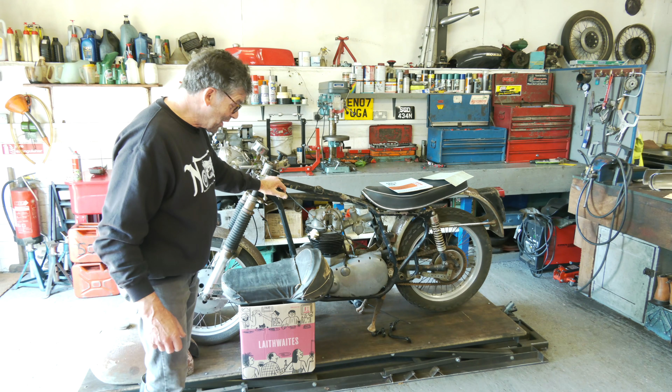We've got another Norton, no ordinary Norton, this is a P11. Behind Alex, just point out over here, we've got my project bike. And you're going to say, what have you done? Well, we'll talk about that in a moment.

Today we've got the Scott up and running. So we've got the sidecar on, we've got most of the wiring done. It has got a little bit of work to be done still - we've got to maybe adjust the clutch and a bit of fine tuning, but it's up and running.

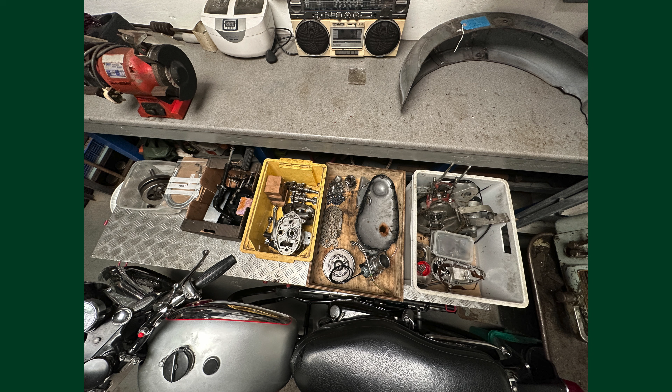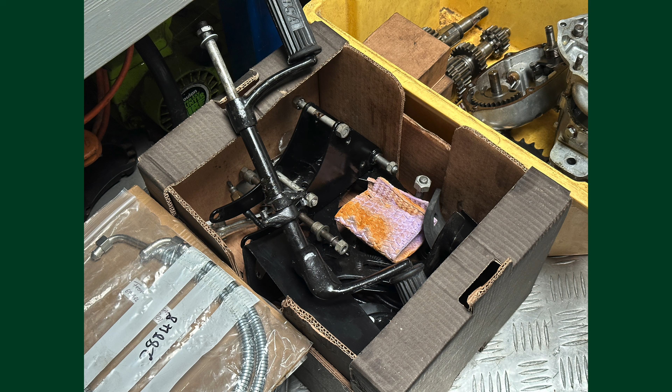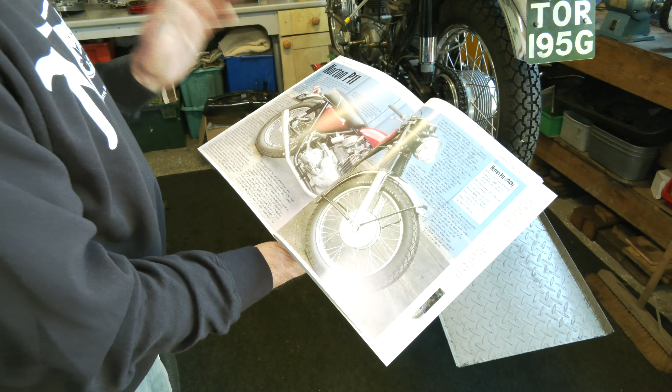What we really want to talk about today first is the Norton, the P11. So what we got here is the P11. Now this one is slightly different - it's got pea shooters, slightly different to the one that's here. But the P11 was a bike that was only in production for a couple of years.

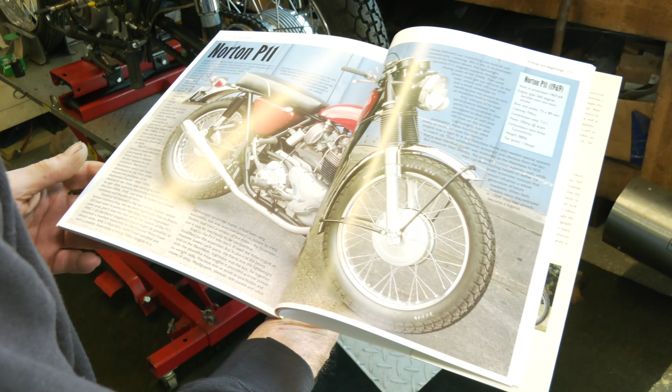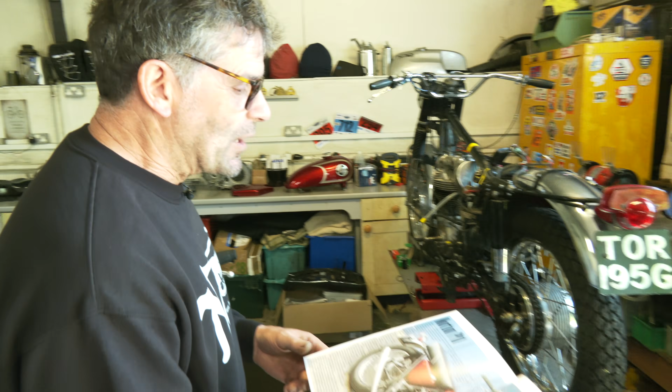Basically AMC, everyone knows that, is when you had all the companies merging together. It was the parent company of Norton. So what had happened was they had a surplus of parts for Matchless. And at that time in '67, they were talking about - we had the Atlas last week - the Atlas had come to the end of its life really. They needed something more modern because the Americans were the ones that really wanted the Norton range of bikes. Everyone knows America got what they wanted, they were more into bigger capacity all the time. That's why Nortons went up in capacity. So the Atlas is 750 and they wanted a new bike.

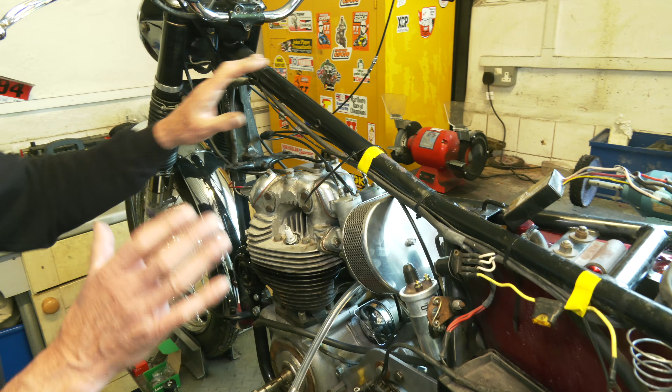So it was on the cards to build this Commando. But at the time, in the States, they were riding a lot of off-road bikes and they wanted more and more capacity. The idea was to put the 750 Atlas engine into a Matchless frame. If you look at this frame, it's not unsimilar to a Commando frame in a way. Before you had the featherbed, so this has gone to a single tube frame. And if you look at the Commando, this is very, very similar, but this would be for a Matchless engine, so you can see it was built around that.

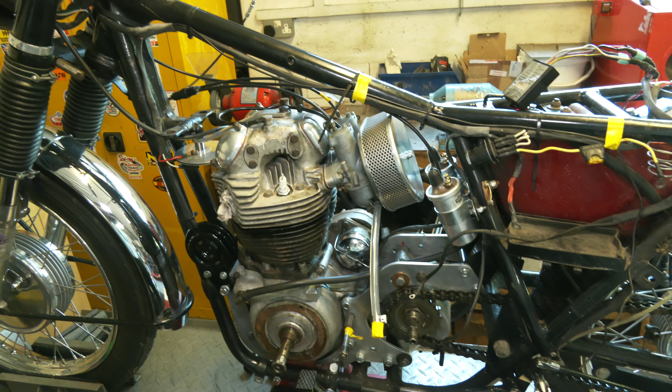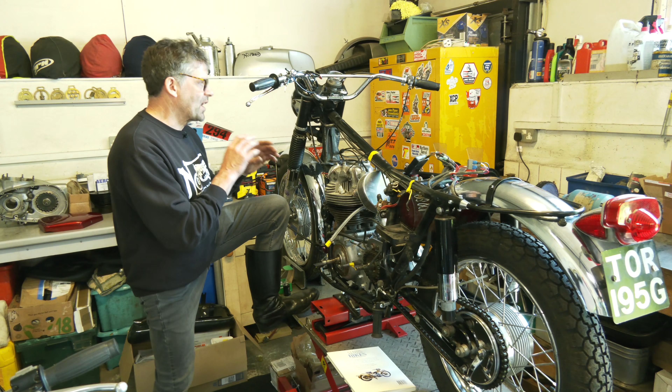So it's a lightweight frame with a 750 engine, and this is what was called a desert sled. Powerful, had a top speed of 110 miles an hour - for an off-road bike in its day, think how much power that was. Like I say, it only had a short run for 2 years because I think all the money, Norton were developing their Commando, and everything was coming to an end with Matchless, had all these surplus of parts. So they were just taking bits out of the bins and saying, yeah, we can use that, we can use that - and that's what they came up with.

But these all went to the States, this is where the market was, and it's only in latter years that they've started to come back. These are very popular now, we'll talk about this in a moment. And I mentioned before, the roads have been so bumpy with potholes, you can't ride about on powerful bikes without risking going into a pothole. When you've got low bars, like I mentioned last time, you'll be off.

So it's quite nice to have a street scrambler, and this is what it is. What you see now, people bringing out these more modern bikes and scramblers, it's been done before.

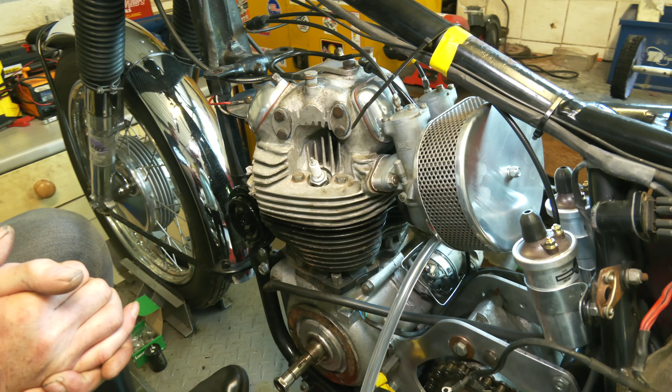So nothing new really, but this bike, the customer sent it in, and the story goes that this was one that was re-imported. I think he's had it 15 years or more.

It was in bits, I believe, when he picked it up, and he started to do some work on it, had it up together, and over a period of time it got laid up. There was some damage to the frame here, where the side stand fits on the frame - this tubing rotted away, got water into the frame. He had that repaired, stripped out the engine, had this all done, and the side stand fitted.

Now he's at the age where he wants to ride it, so he asked me would I put it together. It came in minus the mudguard, wheels are in, much the same as you see it here.

But the first thing we looked at was the wiring, and this isn't a decent loom because it's not colour coded, someone's made this for it. He's bought a lot of parts for it, and I did say to him about finishing it off.

But I said we've got to strip this engine, because if I get hold of the crankshaft, you can see we've got end float on the crank. Now if you can imagine, the crank's going backwards and forwards.

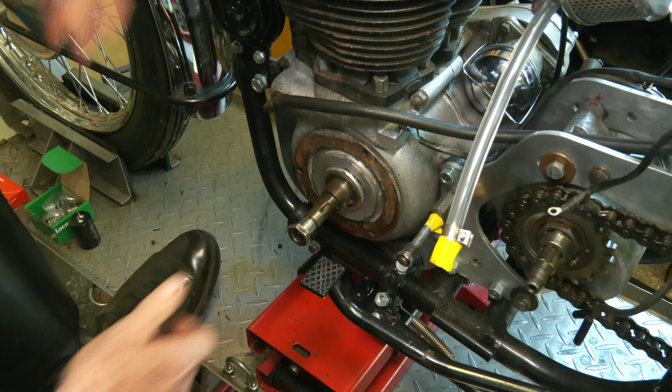Do that again, Dave. That's moving from side to side - well, it's going backwards and forwards in the crankcase. What that means is the conrods, everything's running out of line, and these bearings are in and out.

It's time to take this apart, because we know we've just done one before, what you find when you open these things up. So it's a good idea to take the engine apart and go through it.

So you have the head off, valves out, we check the guides, do the guides if necessary, same as before on the Atlas. We have the crank out, the sludge trap out, check all the bearings and rebuild that up. The gearbox will be taken out and we go through it - he's put a new sprocket on here and done the seal, but we'll whip that box apart.

Interesting thing about this engine, very quickly - with the Atlas we had a magneto, which was here, with the 4-spark conversion. Well, magnetos are getting really expensive, and Lucas stopped making them, so this is the first generation of a set of points.

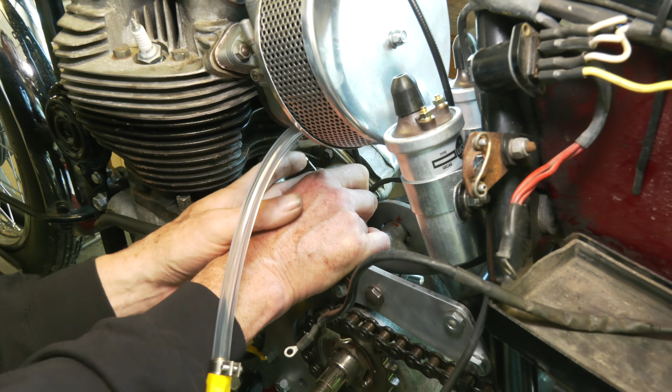This is your assembly, where this is your generator here - I'd say call it generator because it's not a magneto as such. In here it's now been converted to a Boyer setup, an early one. What was in here originally would be a point setup.

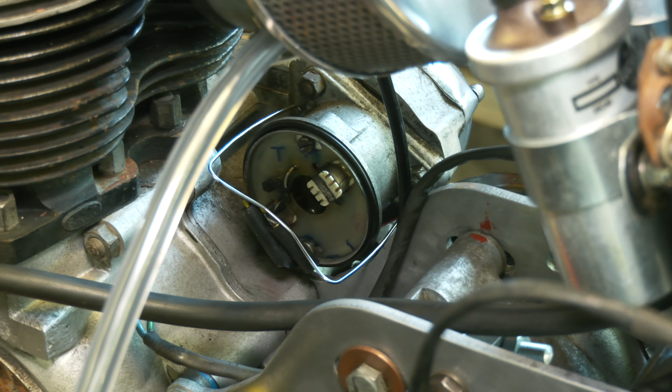Same as you get on, say, the A65 - you take the cover off, or on the Commando it'd be on the timing cover on the outside. It'd be a set of points with the bob weights behind. They put it here where the old mag was originally. If you look, I'll make a reference in a moment.

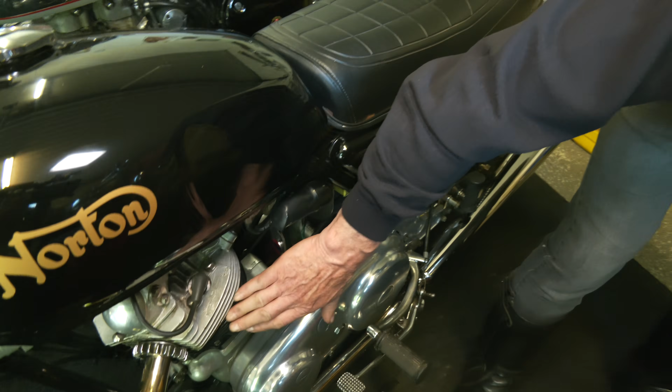A few years later on, if we look down here - this is the same engine. This is an 850 Commando... sorry, this one is 750. 750 is this one, my one's outside.

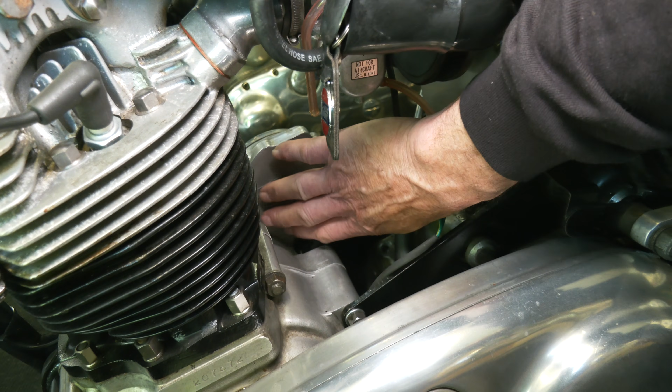This here is where we were looking just now - there's nothing there now, though that casting's still there. They stopped making it with that set of points assembly similar to a magneto, and decided the best bet would be to put it on the other side in the timing case. So it's never really changed.

This was a long run engine - it started as a 500, went to a 600, then a 650, 750, then as you know the 850 Commando, which I've got outside.

So this will be a nice job to do. Once we've sorted out issues with the engine, we can build it up properly, put a new loom in, and I think it'll be a nice bike.

And we'll cover this one - yeah, with the high level pipes, I'll just show you. And the tank, if you look at the tank, it's got a lovely little tank. It's going to be quite a pretty bike.

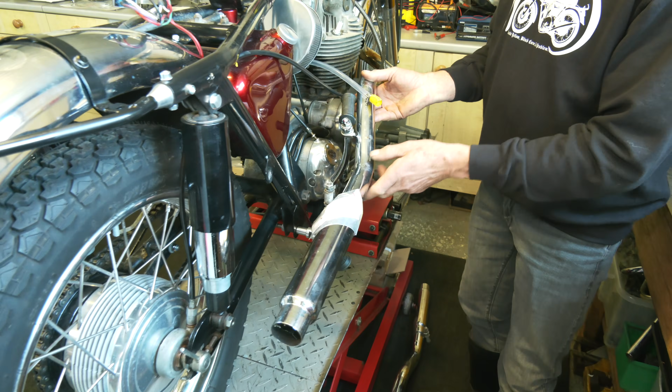Here you can see roughly how it's going to be. This will be the other side, obviously, but it'd be nice, high level pipes, one each side like this. It'd be a good looking bike.

So that's that one. Now, the other job in here is a project bike. I said I was waiting for my bike to come down from Middlesbrough - well, this is it. It's very similar to an RGS, although it hasn't got the lugs on the frame for the rear sets, so it isn't. But it's a road rocket engine, and it's got a lot of Eddie Dow bits on here.

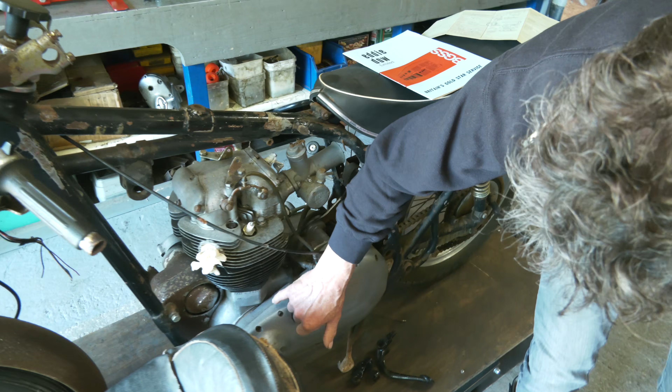Why I picked this up is because it's pretty well unmolested. It's got the road rocket engine, 650. It's got no broken fins. It's got a QD hub on the back.

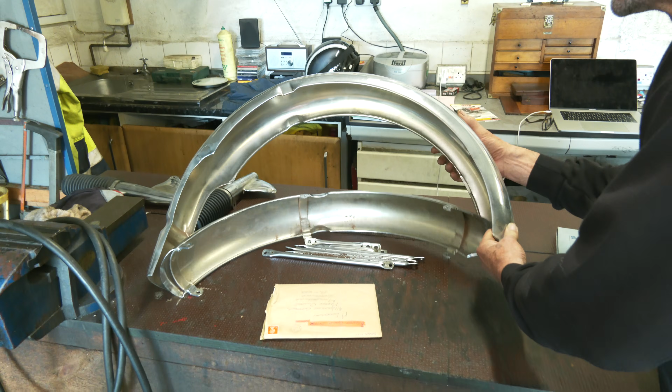These mudguards, okay, these aren't the RGS type ones. It's got the stays here, which would be - these are much narrower mudguards, but there are new mudguards for it. So on the bench here, we have a new mudguard, which would be a Gold Star mudguard for it, and the new front mudguard. Well, I've got some stays here for it.

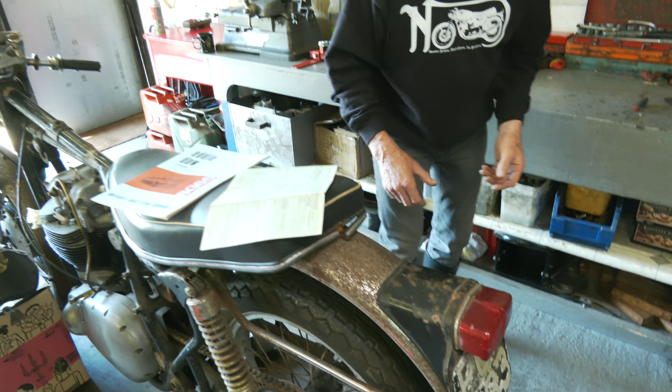So we're going to go through it and explain what we're going to do and what we've got here. The back wheel is the correct wheel, QD hub, but it hasn't got the big dust cover. It's got a different type of spacer here.

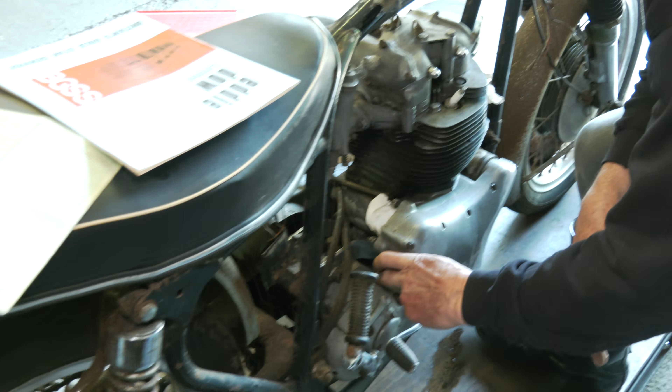When we come to look at the engine and the gearbox, we've got the correct stamping on here, and we'll know when we take it apart. This is the RRT2 gearbox, close ratio gearbox. It had the needle roller bearings in there, and we'll know once we take it apart.

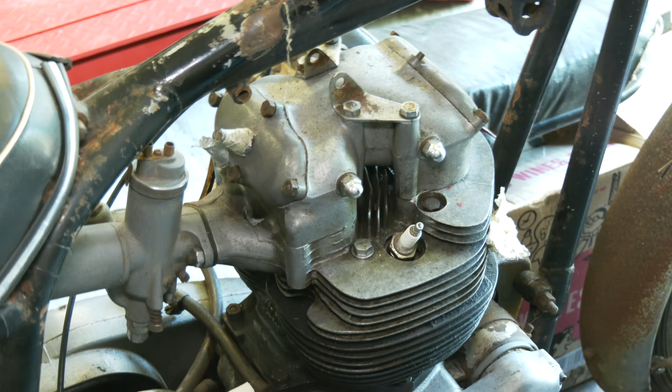Correct engine, but all the engine plates have been chromed. In its time, it's had quite a lot of money spent on it, but it's lost a few of its parts, so they're chromed. The engine covers on the front, they're chromed. And if we look at the headstock, top yoke and bottom yoke, they've both been chromed. It's running these nice levers.

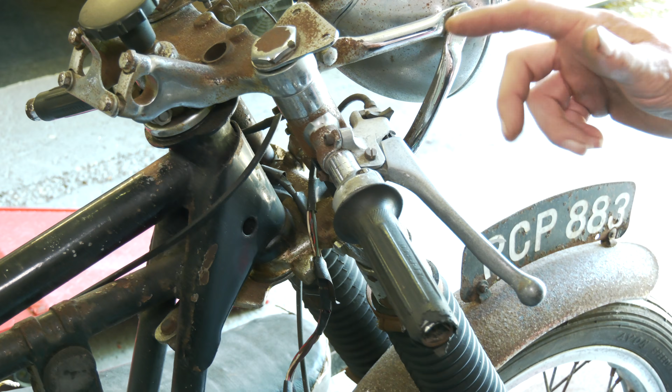These are all Eddie Dow bits. Many years ago, not many people know this, but Eddie Dow was doing upgrades to forks. People know about that, obviously, but what I didn't know, and what this has got, is the Roadholder forks - these are actually Norton forks. This was a mod that was done by him. These were obtained, and you had to change the front wheel spindle.

So we got the big 190 brake in here as well. And it's got some nice bits.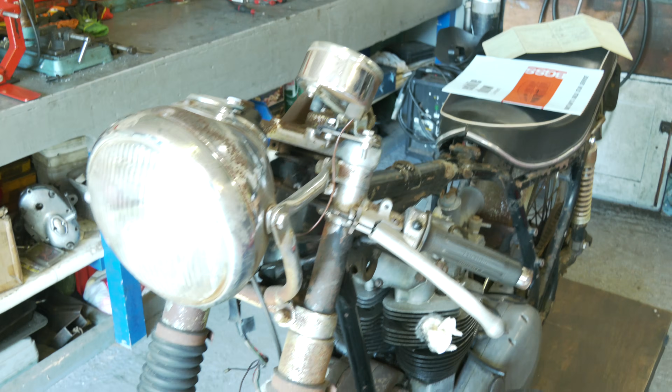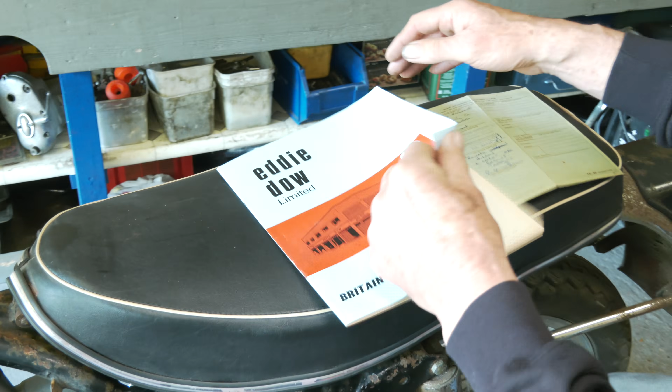So what I was going to show you, what a lot of people don't realise, is that Eddie Dow produced this - this is his brochure. These are all the aftermarket parts. This would be back in the 60s, so you could go in and obtain the parts. He raced, he was well known. There's a lot of interesting reading here actually.

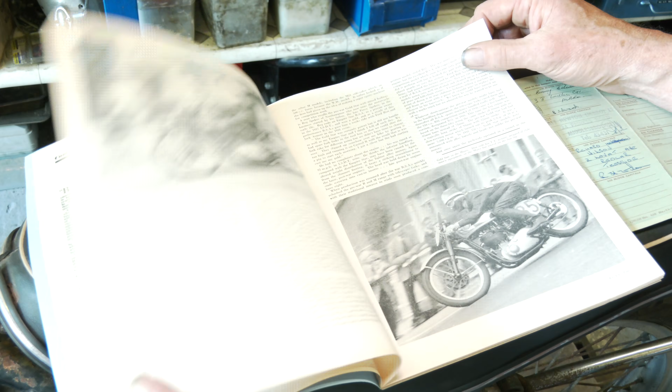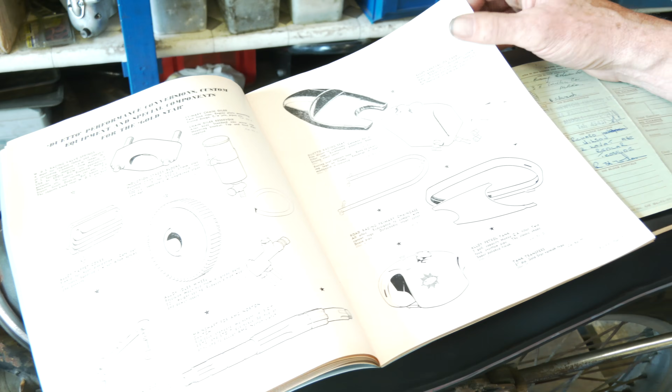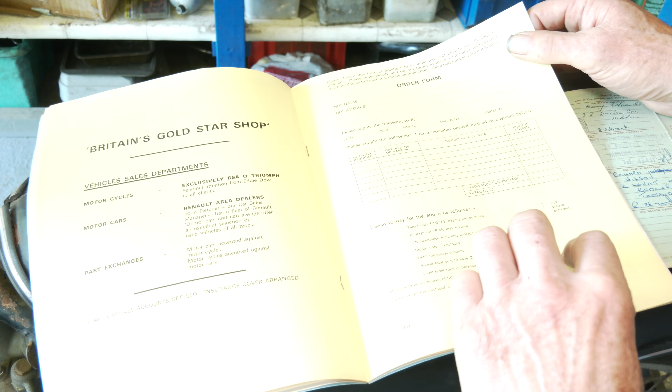And if we go further through here, then we come to the parts. We showed the 500 engine, Gold Star engine, but these are the sort of parts you could upgrade your bike with - so many variants, engine plates, seats, different exhausts. And you had an order form, you could put this in.

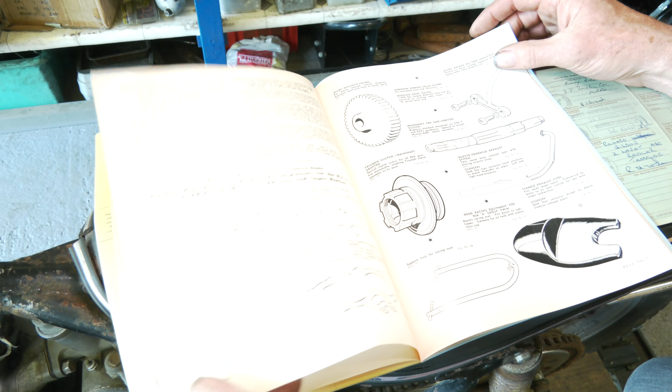We've seen this type of fork setup - you can modify your forks. These are the levers we got with this one here. But there's the big brake as well, conversion, so a twin leading shoe. Yeah, interesting to have this, and it's a good reference.

And here we've got Norton forks, BSA wheel conversion - so that is the wheel spindle for the Roadholder forks. That is in mint condition. I've never seen one before, so I was quite lucky to get hold of it.

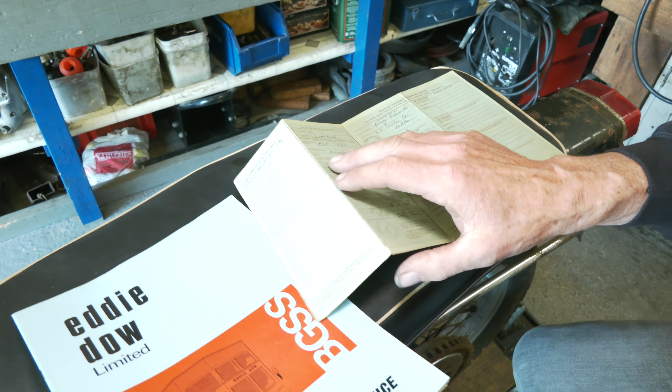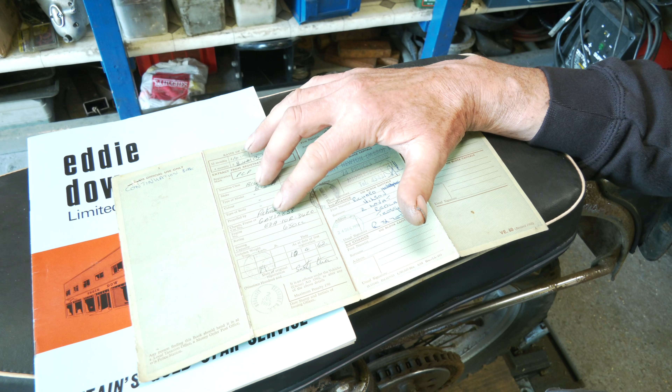Here we have the logbook with the bike. Now, it was registered the 10th of the 4th, 1962, and it doesn't say Rocket Gold Star, but it's got the correct frame number, which it carries now, and an engine number. But the front prefix here is EDA, which someone's going to say - I can tell you what that means.

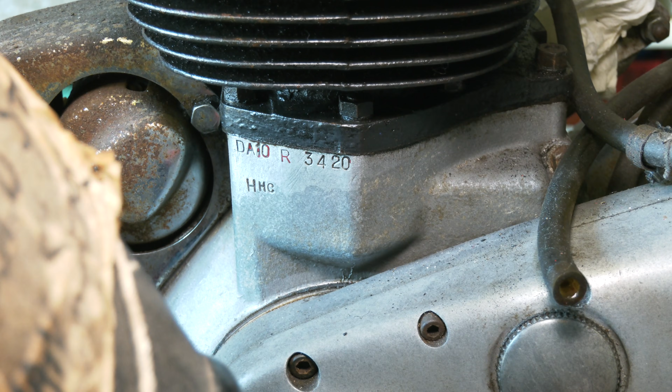If we look at the engine, we can see that we've got the correct letters on here - we got a DA10R, which this is here, DA10R, okay. So E, this is what it is, it's got an E at the front. Whether that means E for Eddie Dow, I don't know, but it's got DA, that's what that DA is for, DA10.

3420. So that's correct, but it's got an E in front of it, but it's not on the casing. So I think it's going to be quite a nice bike.

There's one or two bits here that I'll probably change. We're not going to do this as an RGS, we're not going to go down that road. We're going to make this into a street scrambler, because I've already got an RGS and I'll keep this bike. We'll do the frame - I'd like to get that cleaned and painted.

So looking for someone who would like us to show a little bit of what they do, and maybe they can help us out. So a little bit of chroming to be done - we need to get the yokes re-chromed and the engine plates, and really that's that.

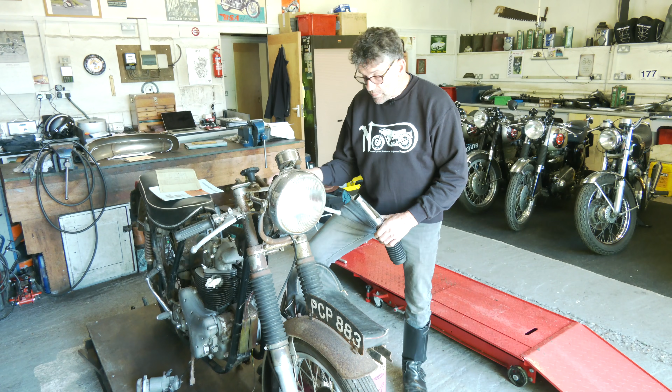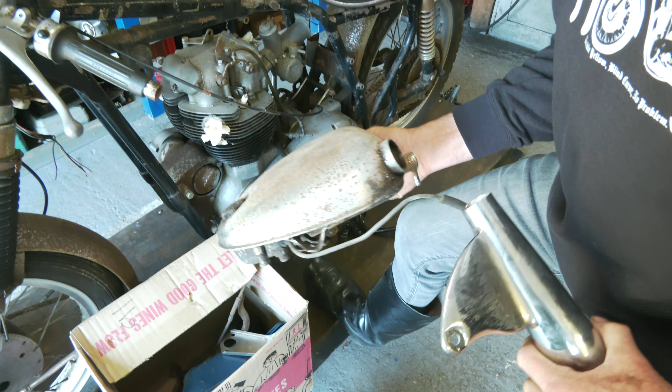We need an oil tank, because we've got an oil tank in here but it's quite battered. Let's show you this before we move on. So it shows scars, it's been dropped - this was around the other side obviously, but it had a lot of chrome on this bike. So I think we'll probably end up with another tank for it.

And then another battery box, and we'll just have it black. But in here is a battery box, which will go on this side. A lot of this has been robbed in the past, and a few bits obviously have been acquired again.

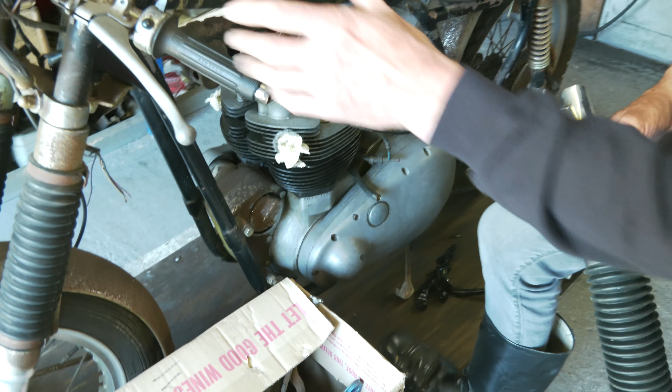But getting back to where we've got the clip-ons, we're going to put these fork shrouds on here and have the gaiters like this, and we'll run this with high bars. We'll get the lamp re-chromed, so I think it is quite pretty.

What came with the bike - it says 1950 Gold Star Clubman seat. I don't think it's genuine, but if anyone wants that, I'm going to get rid of that.

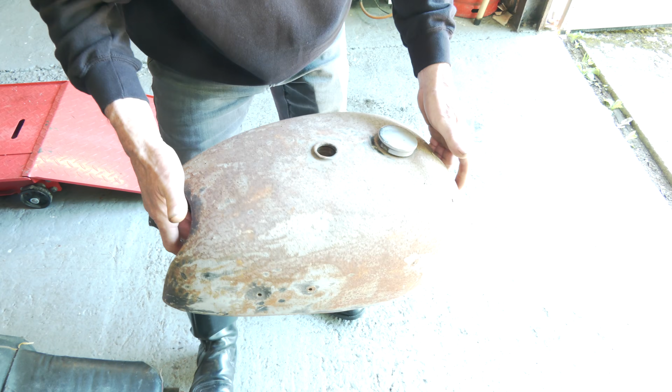It did come with a tank, and we know this is probably a Gold Flash tank, it's the early one. We're going to run this on a smaller tank, we're not going to put a big tank on it.

Now, what it did come with, I would imagine this was for endurance racing. This is obviously for a BSA, got central fitting. It's got a Monza cap fitted on the side for quick refills. We'll have a breather pipe on here, but that is quite repairable. That side is good, the underside of it.

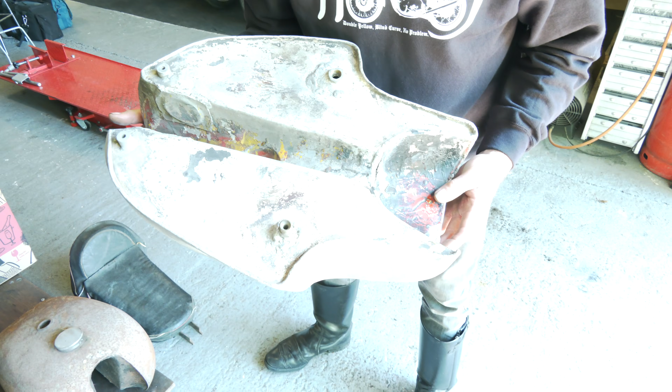Someone who's looking for this type of tank, I've got one, and I'm happy to get rid of it and help somebody else out with their project. It's got a little bit of damage, but if you want that tank, it's available, and we'll come to some agreement.

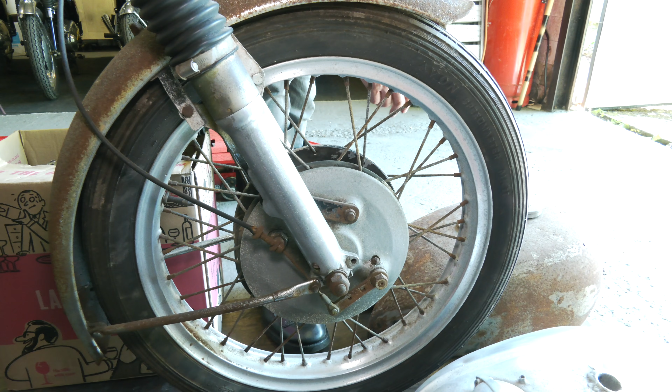We need to strip the wheels, we need to re-spoke the wheels. So the forks, everything's got to come out. So we're going to paint the frame, re-chrome the chromeware. The wheels will be rebuilt with stainless steel spokes, and everything will be polished. And I think it'd be quite a pretty bike when it's done.

But it's not going to be quick. But we will do this between jobs, customers' jobs, and I will show you as we go taking it apart, and as we get bits done, it goes back together. Hopefully we can leave it on this bench here - this will be the project bench, so it doesn't interfere with customer work.

But yeah, I've always liked these, and this will take the place of the A65. So once this is up together and I can see it's going to be okay, I'll let the other one go. An interesting project.

Okay, so the Scott, here it is. So yesterday, put the sidecar back on, had to put the chassis back on first and put the body back on. A little bit of update about this.

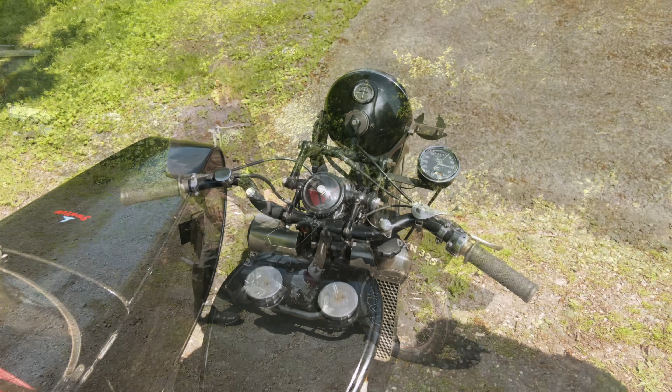So we got to this stage before and we tried to start it, and it had a little bit of an issue, had a water leak. So I let the bike without the sidecar go back to Kevin Bayliss. He sorted it out, bless him. A lot of work on this old girl - it's obviously had quite a hard life in its past. What we've got on here to sort out is obviously the horn, just got to trace all the wires in, make it tidy.

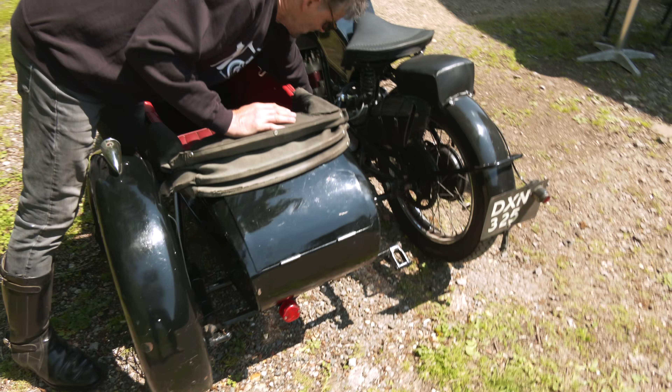So yeah, people said about the rear light - it's a tiny little light. What we got on the sidecar here is an additional side light and a brake light. If I just touch the brake pedal down here, you should see that come on if it's still working. Yeah, yeah, so that will help it be seen.

And if you look on the wing of the sidecar, from this side you'll see it, little side light, that's period.

For some reason, and this is the frosted glass lens, this is the side light on the front, I think what's happened is we've been running the bike up the road, but the main beam bulb is blown. I can see the discolour in it.

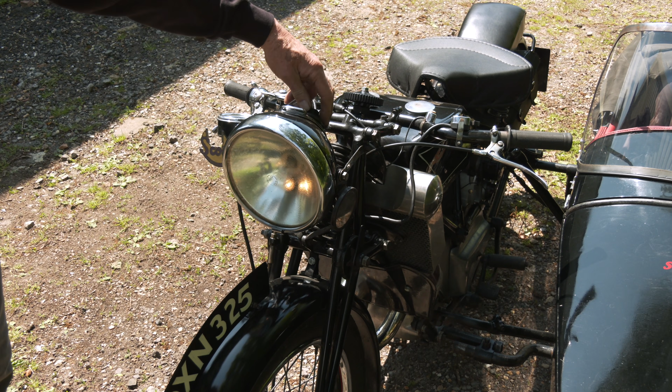Yeah, she runs okay. It has got a little bit of clutch slip, so we need to adjust the clutch, and we just check the carburation because it wasn't running off choke so well just now. But no, she's good. So hopefully this can go back to the customer very soon.

Alex's mum's been in the sidecar, and that was great fun. And just to show you in the back, we should show you how you get into this, because it's a tiny little sidecar. Let's do a demo, Mum. Come and jump in.

We didn't show you this before, so what we got here, you can lift this up, then we got the catch on the inside the door. And now it's over to you, Mum.

So it's quite tight. See, once you're in, it's quite snug. How's that feel, Mum? We won't put the roof over you, but you can imagine when that's over you, you feel quite closed in actually. Can't wait to get on the road.

Yeah, but it rides okay, the sidecar. I was quite surprised, the gearing on the Scott is quite high. First gear, then change to second, it's a big jump. But it did pull okay, but going up the hill we had a little bit of clutch slip.

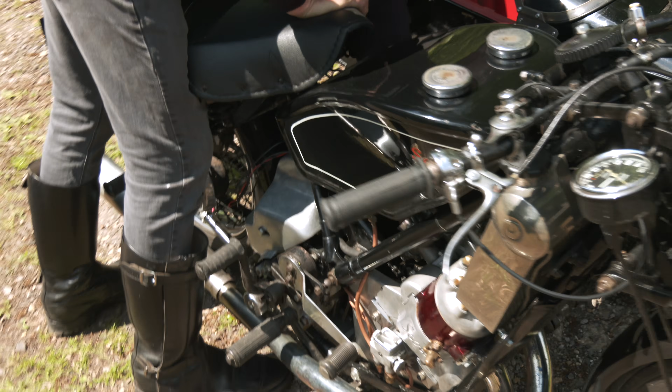The important thing is to make sure that the oil's turned on. We have petrol dripping at the moment - these things are a little bit, they can do this, I'm told. So the oil's on, that will flow into the pump, and it's a drip feed into the engine.

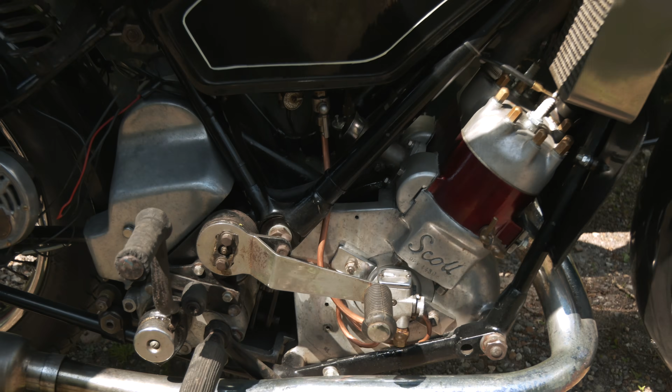This is your choke control, we'll give it about halfway, I think. It might be flooded now, so we'll just see. A little bit of throttle, just kick it softly.

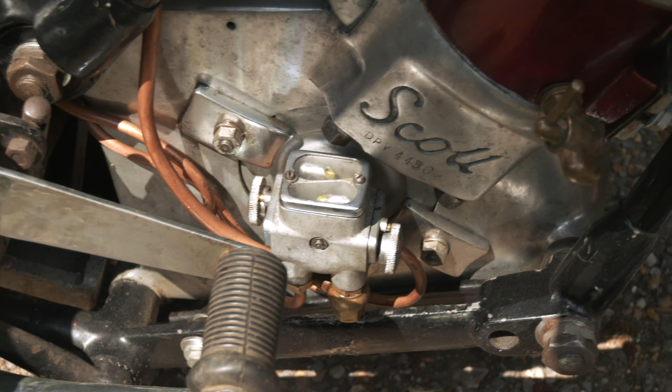Going through the pump here. Now this is regulated on these two screws, you need to adjust so it's the same. At the moment it's about right, it's not smoking too much.

I've stopped it because we just need to, we do need to take the jets out of the carburetor because it has got blocked for some reason. So just a little job to sort out. Oil turn off, and turn the fuel off. But we're nearly there with it really, so that's good.

Good to hear it running, and yeah, it's quite fun to ride. Very light actually for a combination, there's not a lot of weight in it, and yeah, it pulls. Well, it should do, it's 600 engine, pulls really well, really smooth. But just a little bit of final detail to sort out.

So yeah, that's what we've been doing this last week. So I hope you enjoy watching the Scott and seeing Alex's mum in the sidecar.